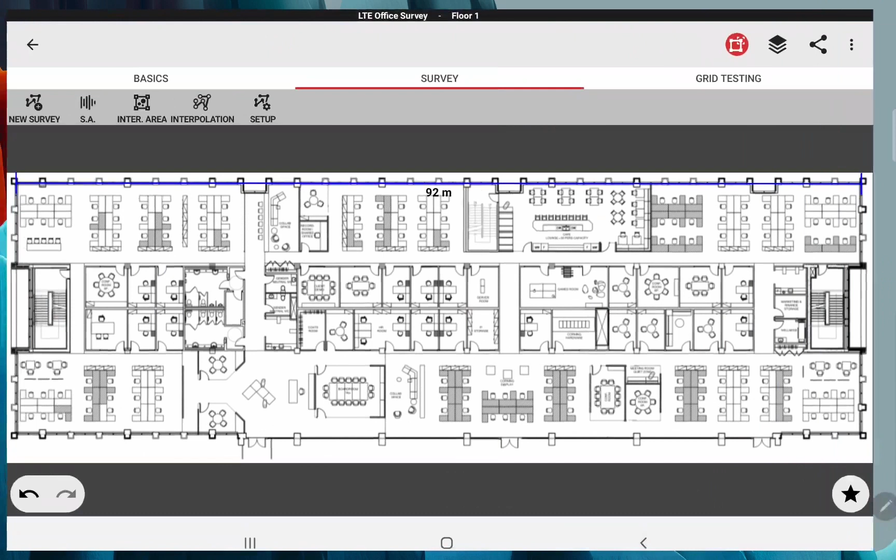Here I have the survey tab open. There's the new survey button, the first button in the tab. This will be used to create or configure our survey. Make sure the scanner is selected. We have two modes, stop and go and continuous. First, we'll cover how to do a blind scan. And for the blind scan, I recommend stop and go.

Under the LTE technology, you have your list of bands. Select the bands you want to do a blind scan for. In this case, I have band 2 and 4. And don't select any specific channels. Leave it as is and you're ready to start a survey. As you can see, I have a message letting me know that B2 and B4 will be doing blind scans. The process is the same as a survey. You place a survey point.

Now the scanner will start initializing. And once the blind scan starts, it'll start examining all the channels inside of the bands that we have selected. So band 2 and band 4 have about 1,000 channels. Once it's done, this will turn green. If you click on the plan, you will get a little snack bar that will let you know about the progress. In this case, we're at channel 299 out of 1050.

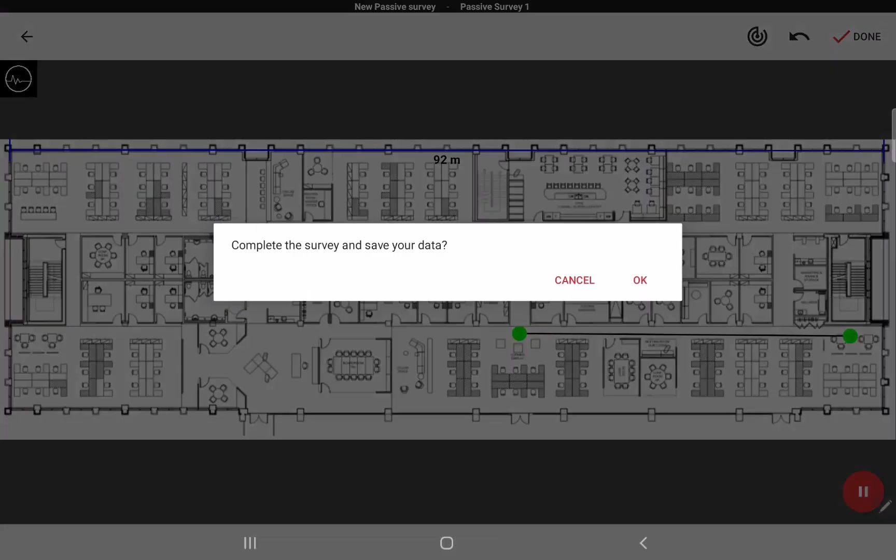Once this point is done, you can move forward or stay at the same spot and click to have another point. You need a minimum of 2 points to be able to complete this blind scan survey and go to the floor plan. For the demo, we will fast forward this blind scan to have 2 points completed. This will go fast. Once you are done, simply click on the Done button on the top right. The application will ask if you are sure you want to complete this.

Okay. Now click on the survey point. You can view all of the results gathered in that point. On the left is the information currently displayed on the floor plan. So we have B4 channel 2050 with PCI 254. On the right side, we have a table showing all the other collected channels and PCIs for our selected bands. We have channel 2050, 2325, and channel 900 on the separate PCIs.

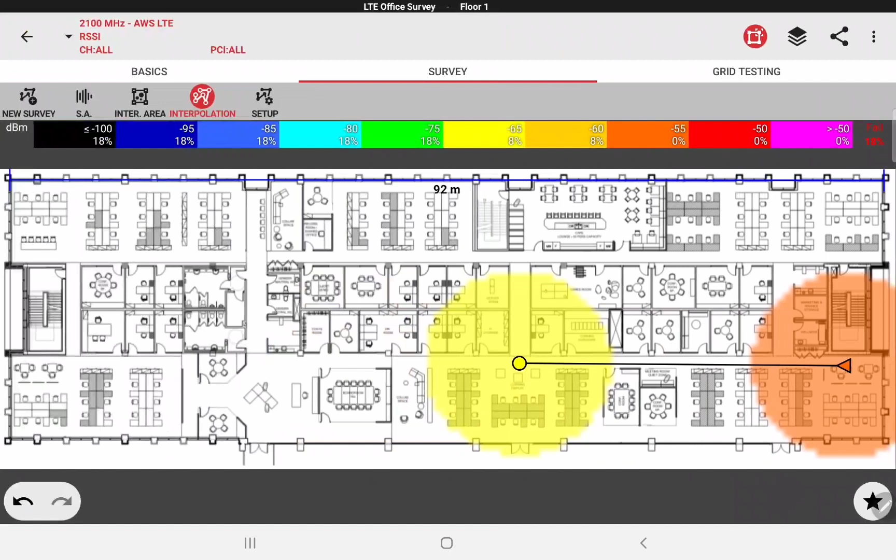Same thing for the other point. We have some captured data. In this case, at that location, we can see that channel 900 was not captured. Now that we've done our blind scan and discovered some channels of interest, let's start a complete LTE survey to test the coverage for those specific channels.

Back to the new survey config panel, we're going to open the drop down for channels, and this time type some specific channels. We'll go with 900 and 2325. Pay attention that these are selected. If you unselect them, then they won't be part of your survey. And we'll also change our survey mode to continuous since we want to do a straight walk without having to put the survey points each time. So this will automatically fill up your walk with survey data, and you only click on your floor plan to specify pivot points. Let's get started.

Similar to my blind scan, I will start from the same spot. Same process, the scanner must initialize. This is faster when it's not a blind scan. Once the point goes green, I will start my walk. And once it's green, now I will start walking straight lines. And every time I want to turn around, I'll place my pivot points on the floor plan exactly where I am turning. And this will automatically place all of the collected data between those two last points.

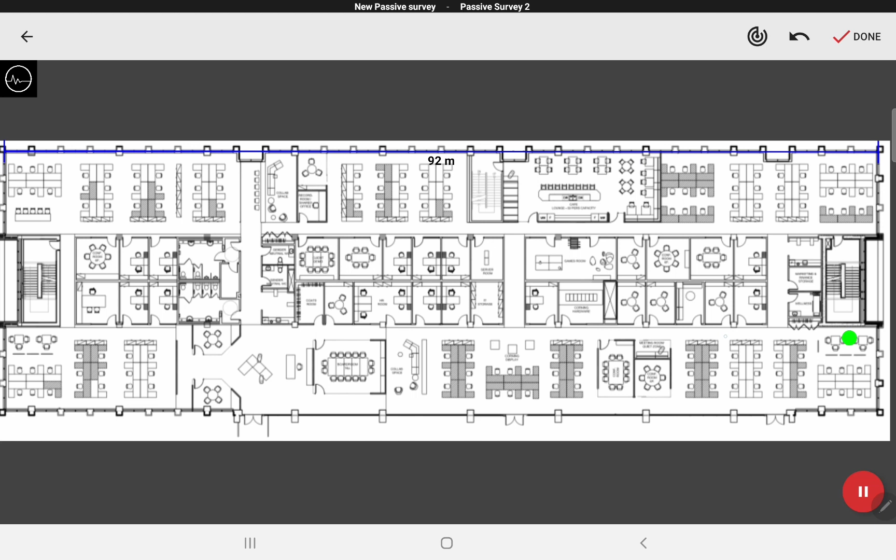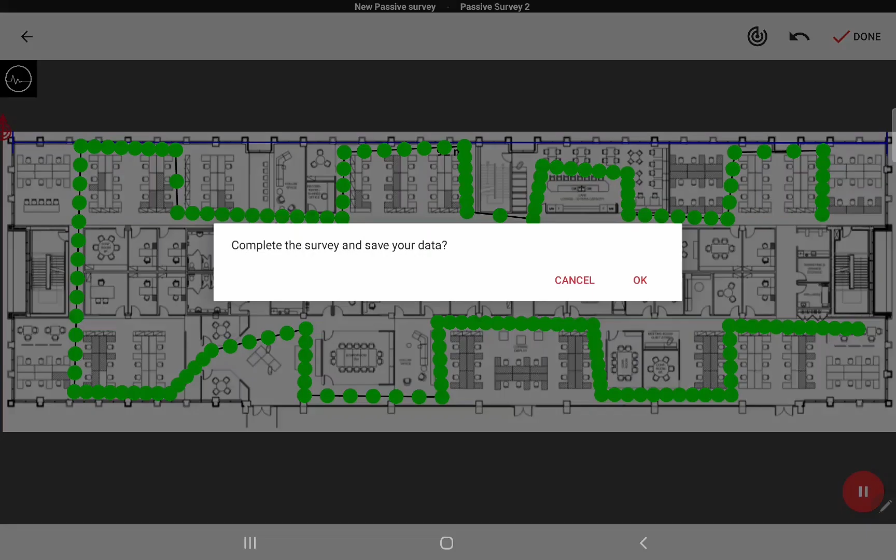And now that I have completed my survey, I will press done, complete the survey, and import it back to my floor plan so we can analyze the collected measurements. Here we can see that the interpolation button is automatically toggled when you come back to your floor plan, and this is creating this interpolated heat map of our collected data.

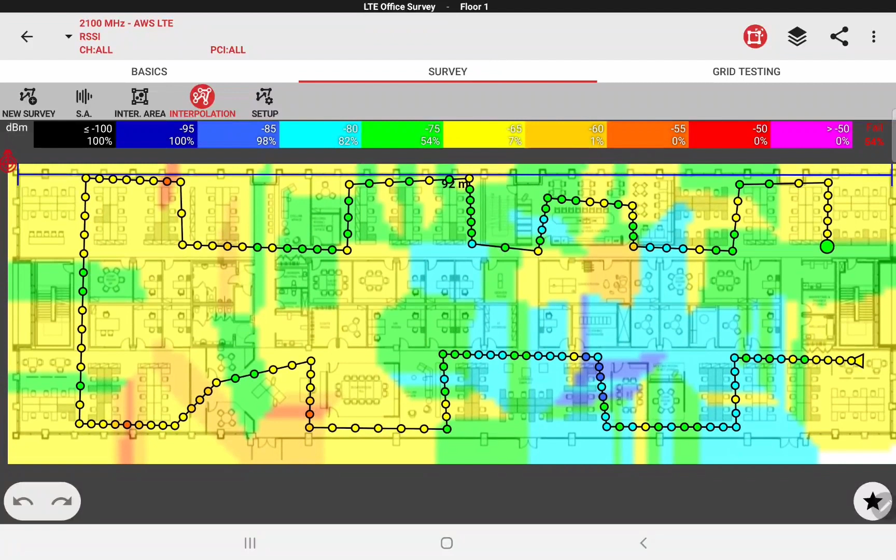We have a legend which is in the rainbow color. The hotter colors represent a higher signal power, while the colder colors all the way to black represent a weak signal. On top, we have this filter. If you drop it down, you have your technology selector, which is the combination of your technology and the band. For that selection, you'll have the list of channels available. And for that, you'll have your list of PCIs available.

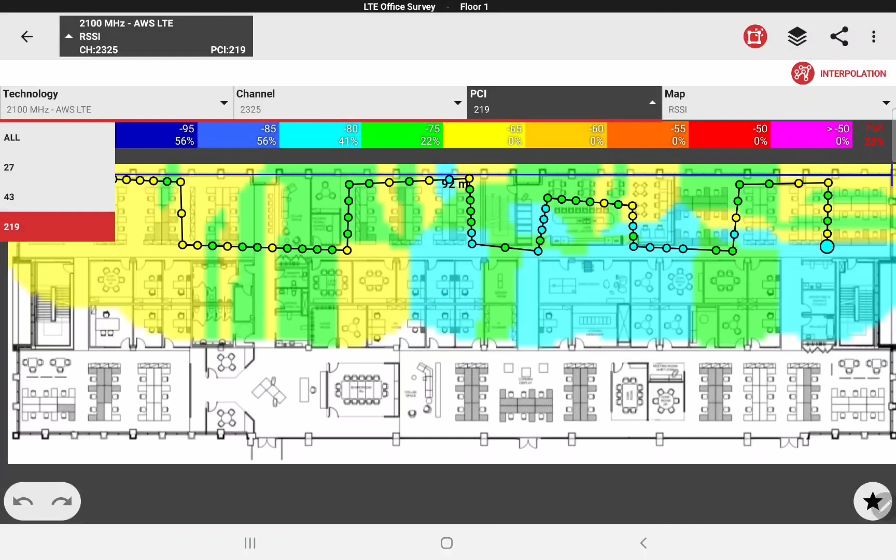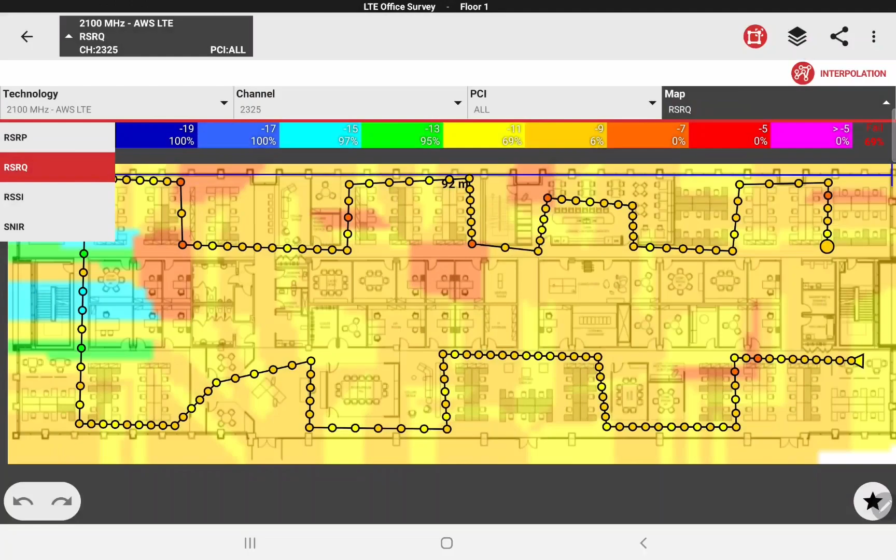So you can look at specific PCIs and how they result on your floor. For instance, PCI 27, 43, or 219. Here with 219, we can see that this cell is active on one side of the office and not present on the other side, for instance. You can also choose between the KPIs you want to see interpolated. We have RSSI, SINR, RSRQ, and RSRP.

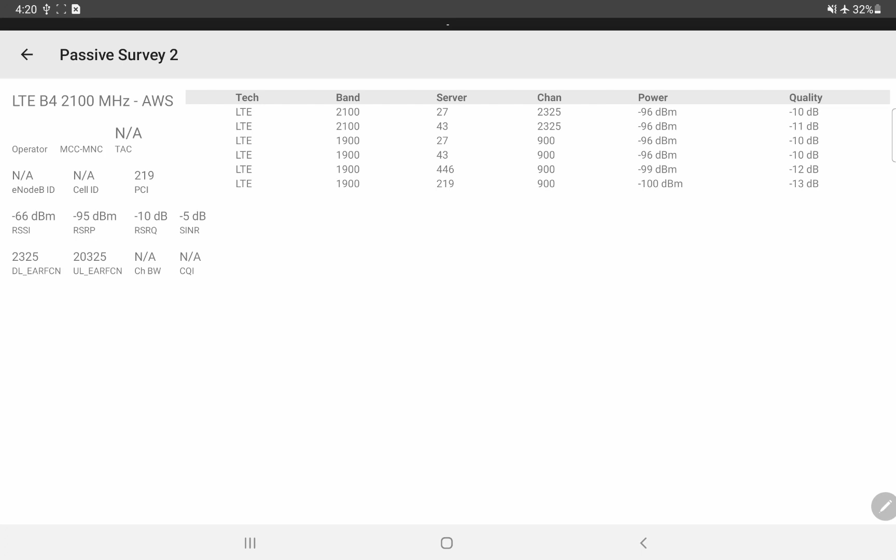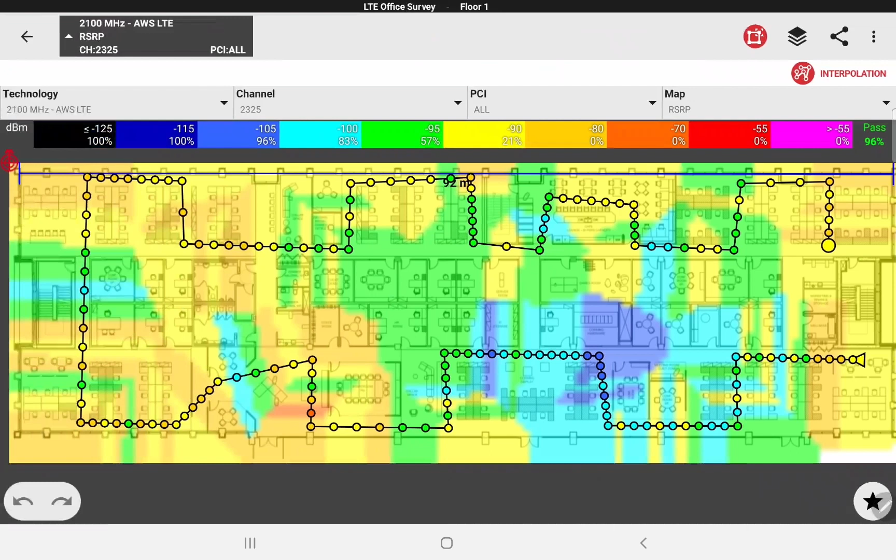And same as the blind scan, these survey data points can be viewed individually as well. If you click on one of them, you will have the information about the displayed cell on the floor plan, which is interpolated, on the left, and you have your table showing you all of the other collected data for that survey data point. And this wraps it up for our demo today of LTE survey with the PRiSM Scanner and iBwave Mobile.